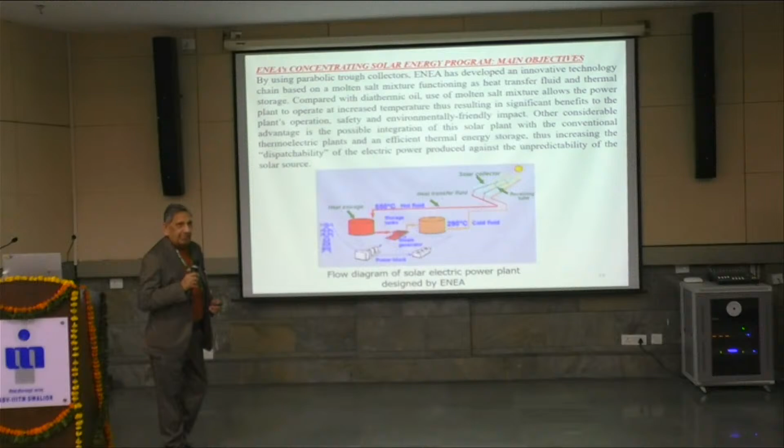Just to summarize it, this is the slide that shows the innovations that have been adopted by ENEA so far as the production of electricity using CSP technology is concerned.

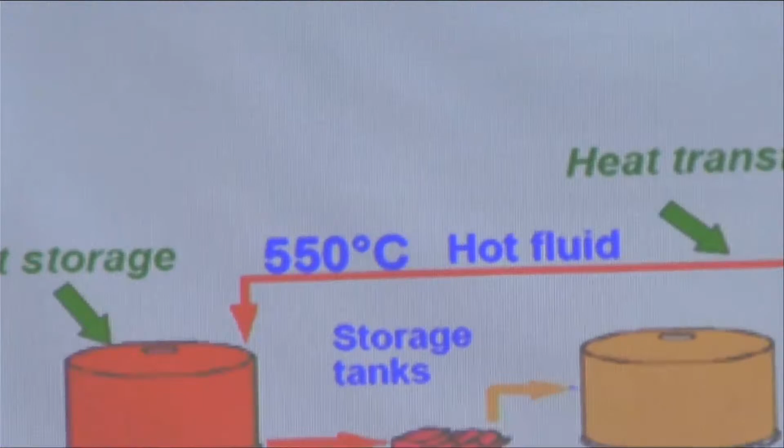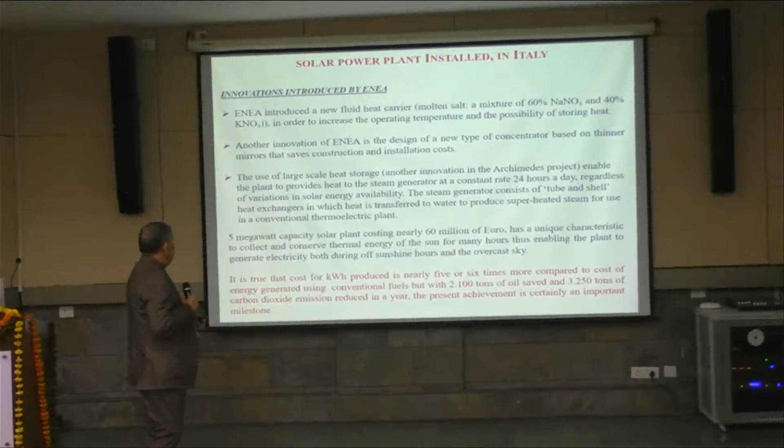So these are the innovations introduced by ENEA. ENEA introduced a new heat carrier, molten salt, a mixture of 60% sodium nitrate and 40% potassium nitrate, in order to increase the operating temperature and the possibility of storing heat.

Another innovation of ENEA is the design of a new type of concentrator based on a thinner mirrors that saves construction and installation cost, along with the use of large-scale heat storage.

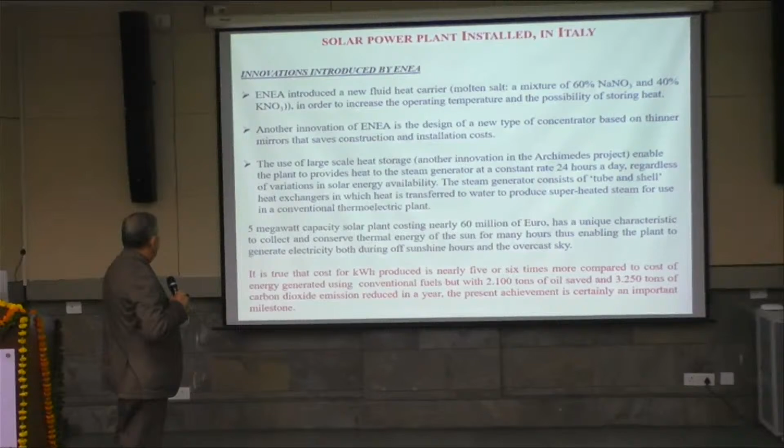Another innovation in the Archimedes project enables the plant to provide heat to the steam generator at a constant rate 24 hours a day. This is a 5 megawatt capacity solar plant costing nearly 60 million euros, having unique characteristics to collect and conserve thermal energy of the sun for many hours, enabling the plant to generate electricity both during off-sunshine hours and during overcast time.

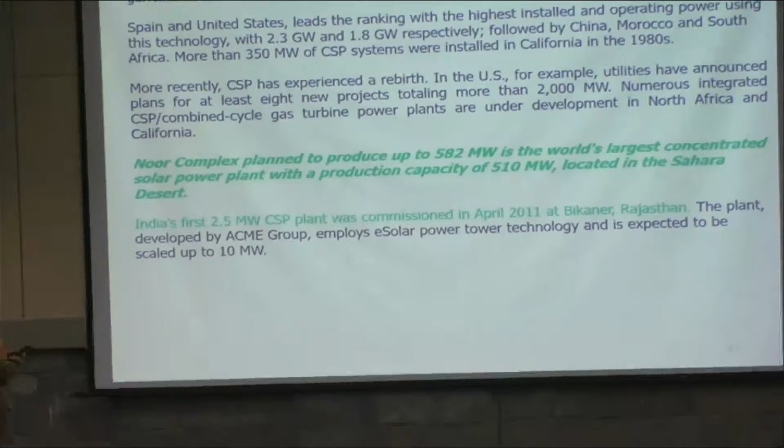This slide is about photovoltaic technology.

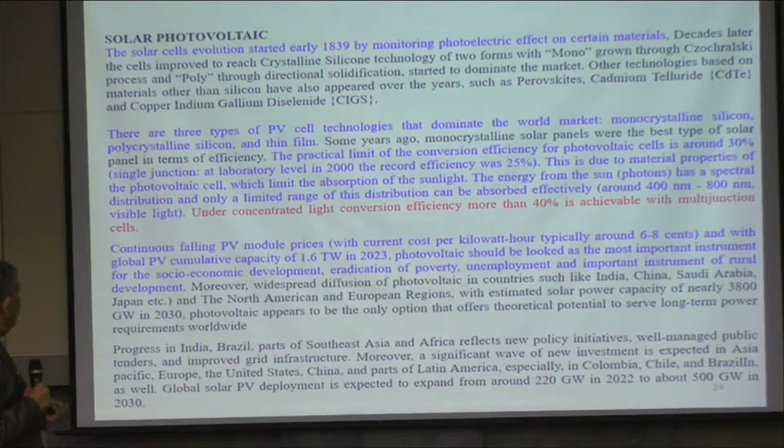As a brief note regarding the cost to produce 1 kilowatt hour using renewable energy sources, as per information available from the literature, hydroelectric power comes in at an average of 5 cents per kilowatt hour. Onshore wind, photovoltaic, biomass, and geothermal are below 10 cents per kilowatt hour, and offshore wind is at 0.13 per kilowatt hour.

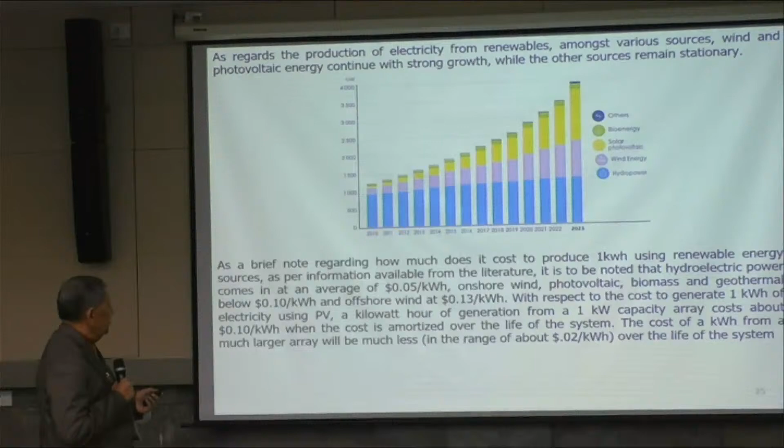With respect to the cost to generate 1 kilowatt hour of electricity using PV, generation from a 1 kilowatt capacity system costs about 0.10 per kilowatt hour when amortized over the life of the system. The cost per kilowatt hour from a much larger installation will be much less, in the range of about 2 cents per kilowatt hour over the life of the system.

So the primary challenge in the photovoltaic sector is to increase energy efficiency, making the structure more capable, and reducing dispersion as much as possible. These next two slides are about biomass.

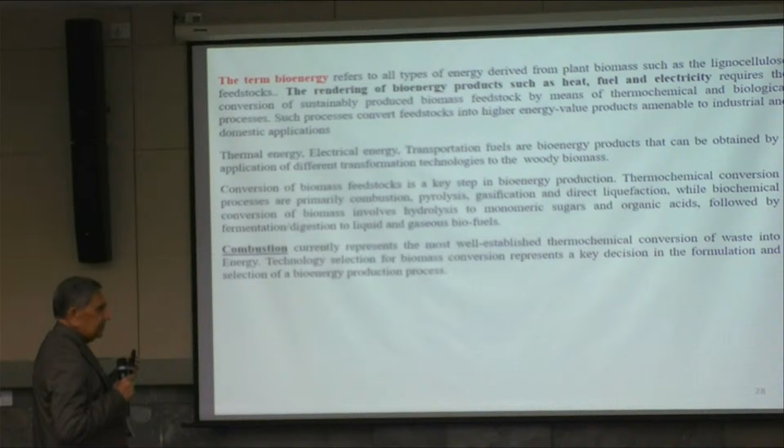I will not go through all these details. I will just tell you what we are doing in this area.

Gasification is currently considered a more attractive process compared to combustion and pyrolysis for both biomass and waste treatment. Moreover, it represents a cleaner alternative solution with respect to increasing environmental restrictions.

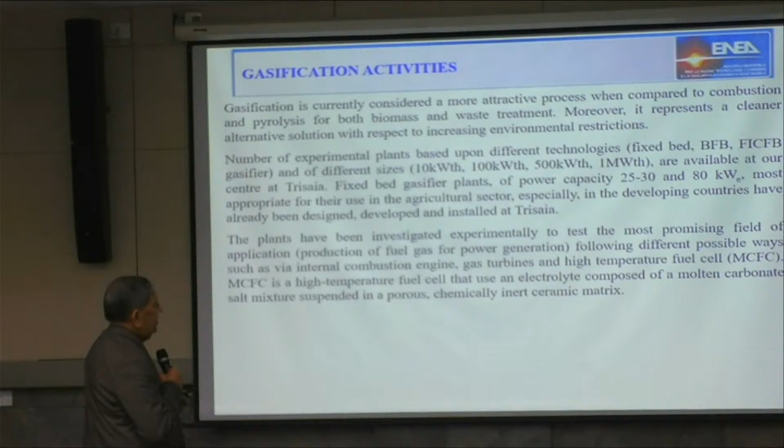There is a number of experimental plants based on different technologies: fixed bed, BFB, and internally circulated fluidized bed gasifiers of different sizes, ranging from 10 kilowatt to 1 megawatt capacity.

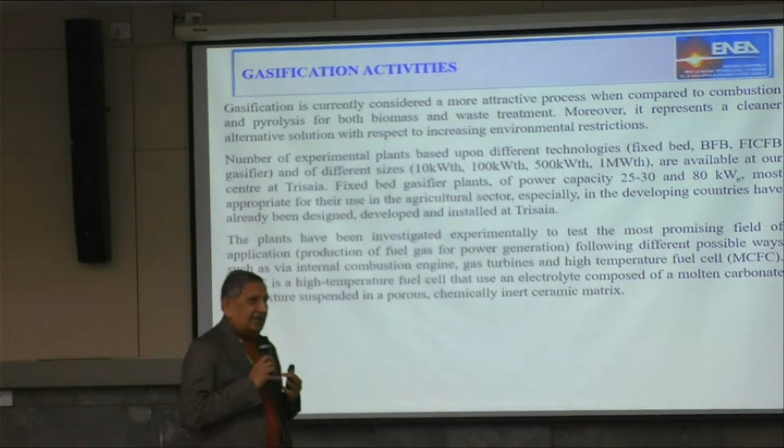These are available at our center, and I am happy to say that our center is the only one at the European level where you can have all these plants. They have been designed, experimented with, and are currently running.

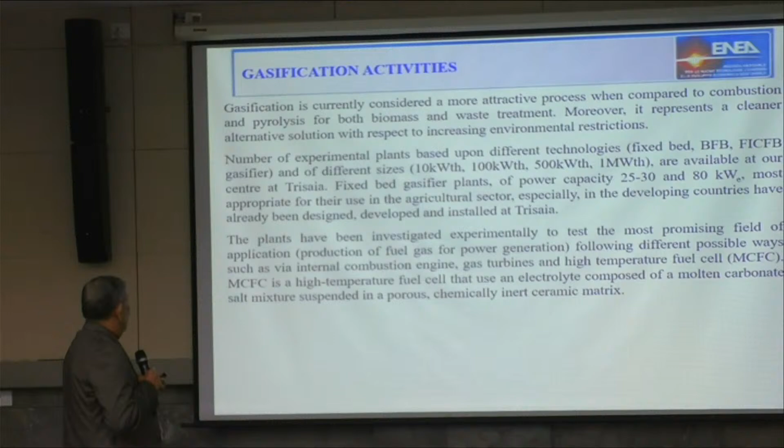So just to say that the fixed bed gasifier plants with power capacity of 25, 30, and 80 kilowatt electric, most appropriate for use in the agriculture sector, especially in developing countries, have already been designed, developed, and installed at our research center.

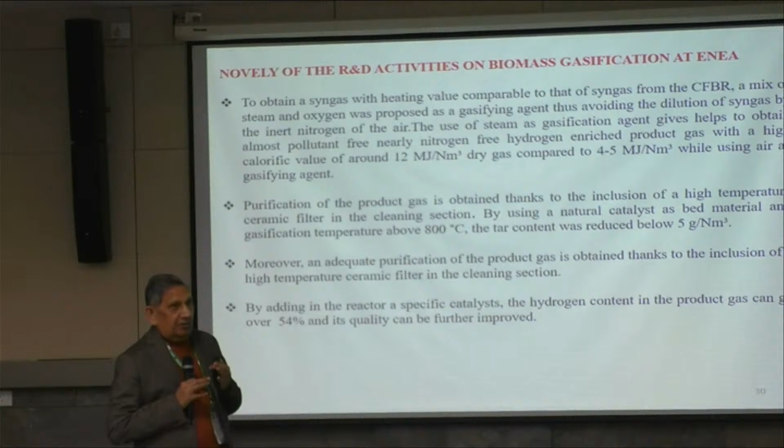For the biomass gasification concern, I am sorry to say that even as of today in India we are using air as the gasification agent. So what does it mean? The calorific value of the gas which we are getting is very low, and moreover the pollutant gases present in the produced gas are very high.

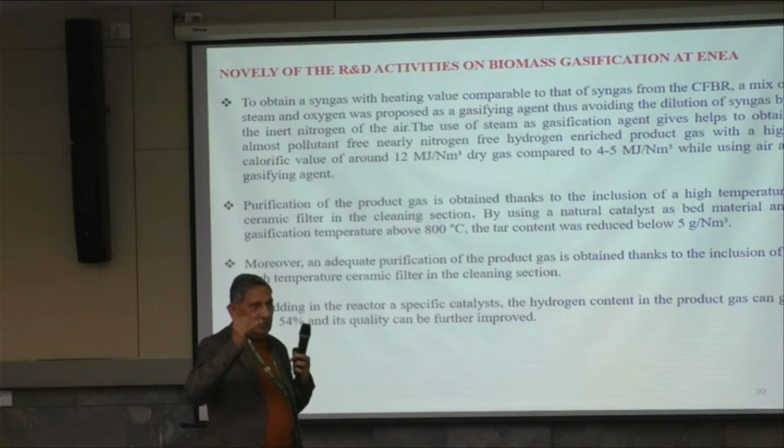Our main aim was to increase the percentage of hydrogen in the produced gas. So what we did at our center to obtain a syngas with heating value comparable to that from CFBR, a mix of steam and oxygen was proposed as a gasifying agent, thus avoiding dilution of the syngas by the inert nitrogen of the air.

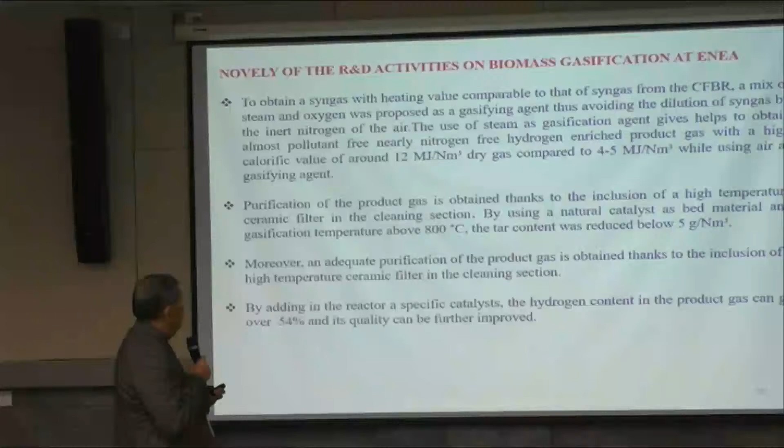The use of steam as gasifier agent helps obtain an almost pollutant-free, nitrogen-free, hydrogen-enriched product gas with a high value of 12 megajoules per normal cubic meter of dry gas, compared to 4 to 5 megajoule.

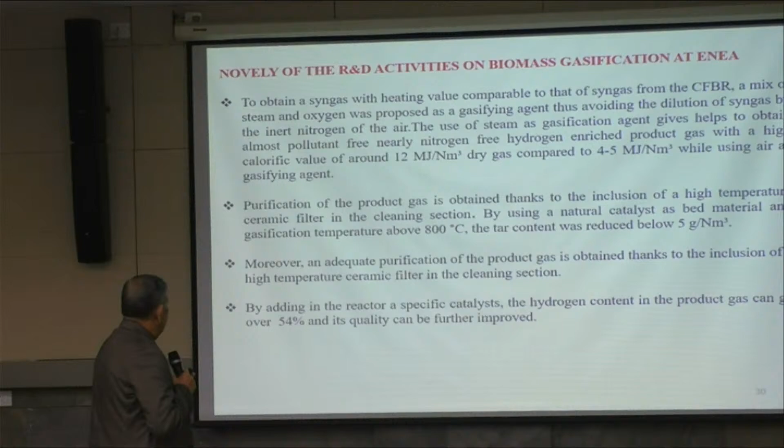Purification of the product gas is obtained thanks to the inclusion of a high temperature ceramic filter in the cleaning section. By adding specific catalyst in the reactor, the hydrogen content in the produced gas can go up over 54% and its quality can be further improved.

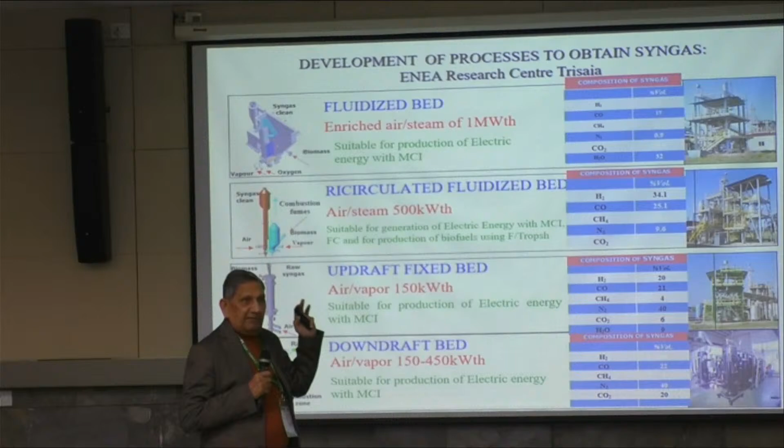This slide shows all these different plants, in the capacity of 150 kilowatt to 1 megawatt thermal capacity. These plants have been installed and experimented, and the results are shown in the slide.

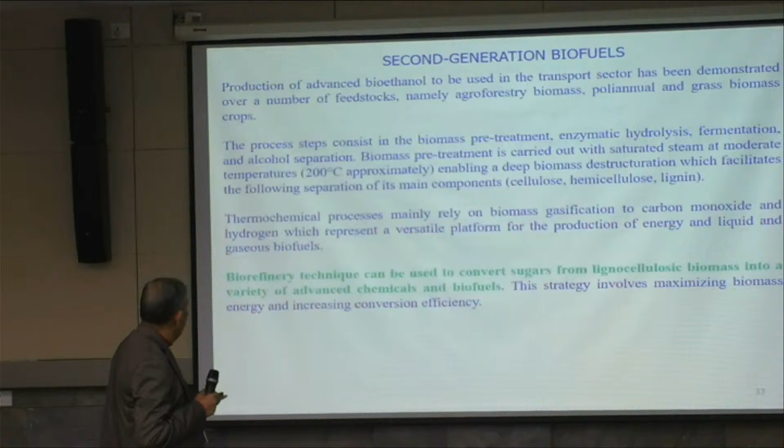I will not go for second generation biofuel. This is from lignocellulosic biomass.

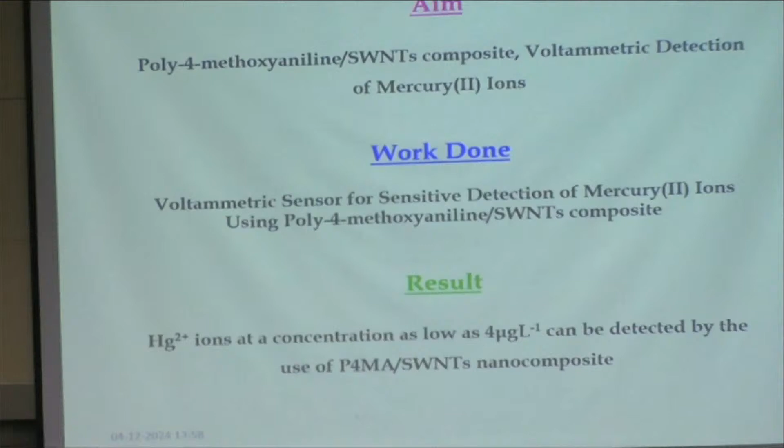Basically this paper aims to synthesize poly-4-methoxyaniline, which is called P4MA. The composite is made with SWNTs composite. After finalizing the synthesis part, we have utilized this nanocomposite for voltammetric detection of mercury ions.

The detection of these mercury ions is done utilizing a voltammetric technique. By utilizing the electrochemical setup, we have performed the detection.

The results were outstanding because this particular sensing element has achieved a maximum contamination level detection. This 4 microgram per liter detection level was optimized, and the not optimized version was also performed.

We all know the entire world is facing a problem, which is global warming. Global warming is caused due to pollution, and there are different types of pollution. Out of that, we have targeted water pollution. Now why does water pollution happen? There are so many reasons, mainly the anthropogenic activities performed by us.

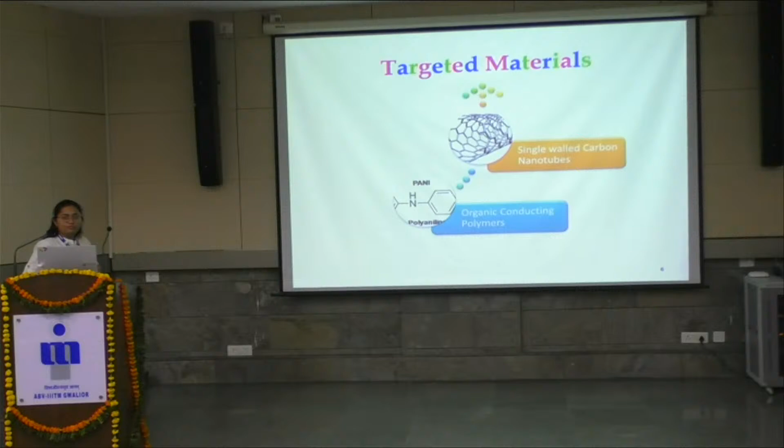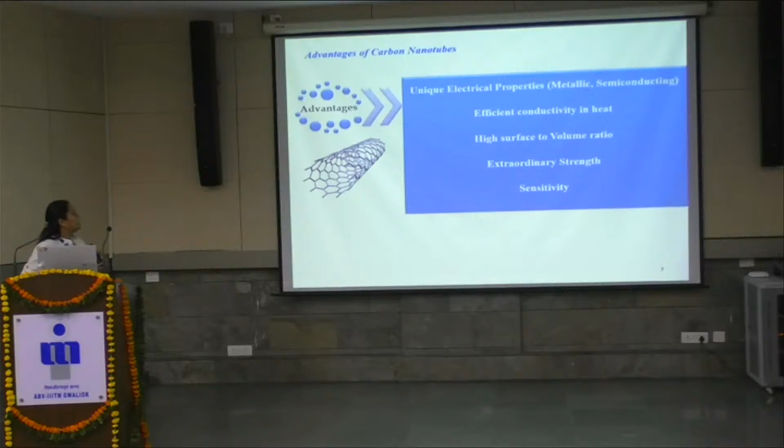So the targeted materials were the P4MA and single walled carbon nanotubes. First of all, why carbon nanotubes? Carbon nanotubes have very unique electrical properties. They are efficient to work in heat also, and since it is a nanomaterial, it has high surface to volume ratio, extraordinary strength, and sensitivity.

But its disadvantages are slow charge transduction and decrease in band gap after high doping. These are the limitations of carbon nanotubes. It is hydrophobic in nature, and since we are targeting the material for water detection, carbon nanotubes being hydrophobic, we have explored organic conducting polymers, say P4MA.

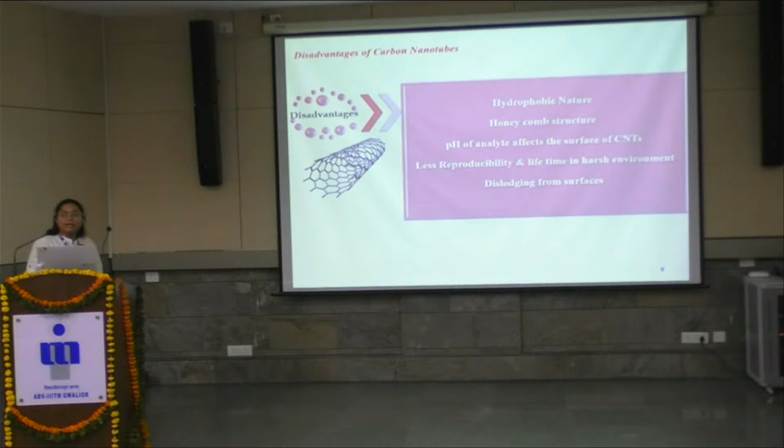After that, the pH of the analyte affects the surface of the CNTs. There is less reproducibility and lifetime in harsh environments, with dislodging from the surfaces. These points have to be addressed when we talk about a sensor, but this we can address by utilizing the organic conducting polymers, the OCPs.

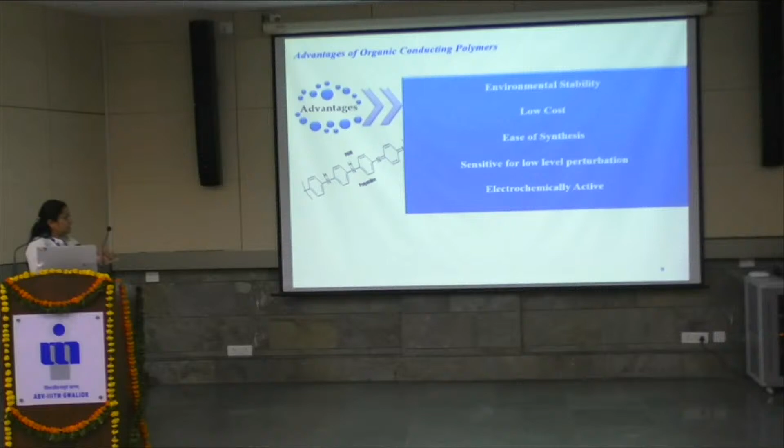So we have utilized organic conducting polymers, which are environmentally stable. They can be worked at normal room temperature. We have ease of synthesis, sensitivity for low level perturbations, and they are electrochemically active.

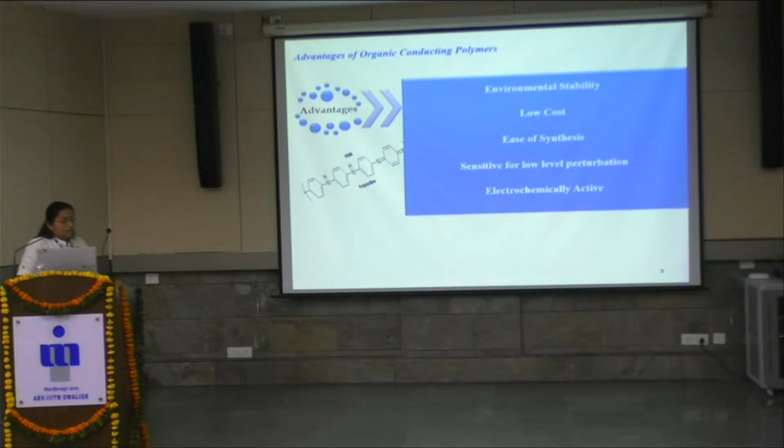Now, a few limitations of the OCPs: low charge transduction and decrease in band gap after higher doping. So these were the advantages and disadvantages of both OCPs and CNTs.

Now, our approach: what we have done is utilize the SWNTs, onto which we deposited OCPs, that is P4MA. Due to this, since we are utilizing this approach, it will give surface activity of the SWNTs retained, and it will act as a sensing backbone, which later can be utilized for the detection of water pollutants.

So our targeted thrust areas were sensitivity, selectivity, and lower detection limit.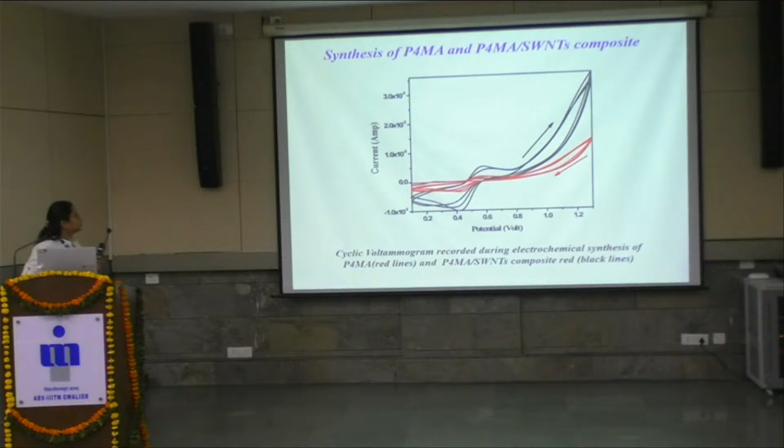This black colored graph is for synthesis of the nanocomposite, where we can confirm a more electroactive nature of the composite.

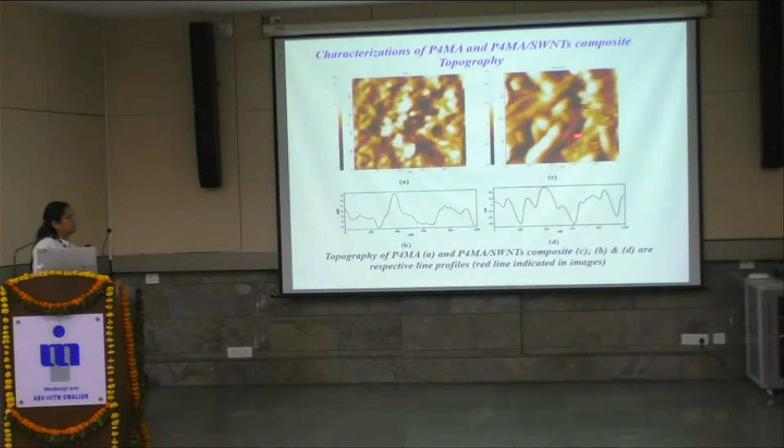This is the AFM graph where AFM images address the topography, and from the images the line profile was drawn showing good roughness. When we talk about an electrochemically active surface, the roughness plays a great amount of role.

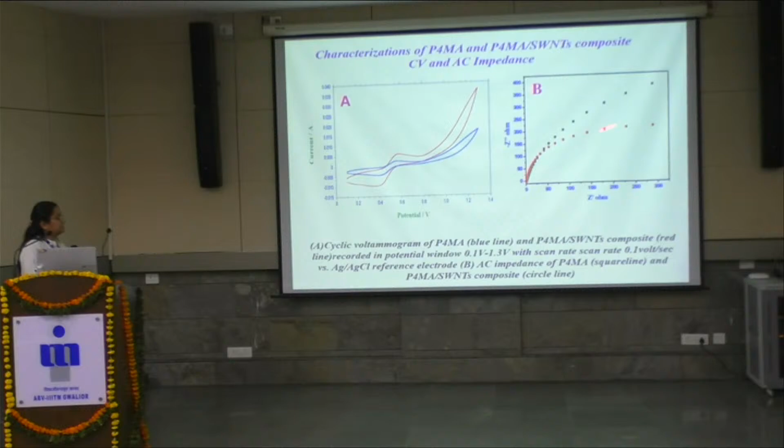Again, the characterizations were done utilizing cyclic voltammetry, where we can confirm the more electroactive nature of the nanocomposite, and the AC impedance spectra again address good electroactive nature of the composite.

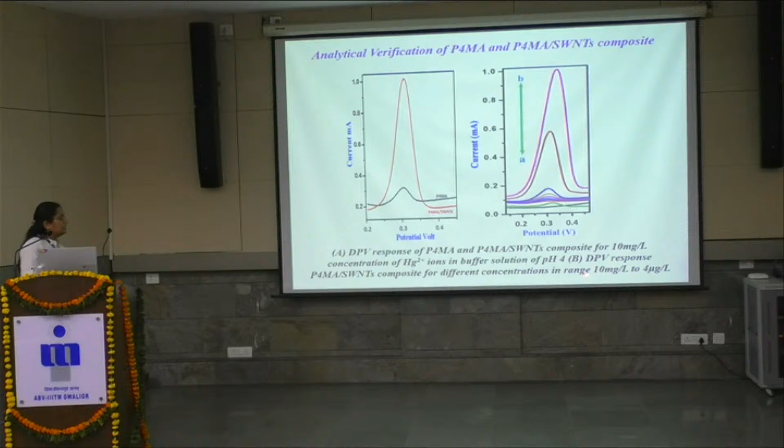First of all, we have explored P4MA for mercury ions, where it has shown less sensitivity. But once we explored the nanocomposite, it has shown good sensitivity. Later, this P4MA SWNTs nanocomposite was explored for different concentrations of mercury ions, and the detection concentrations were in this range.

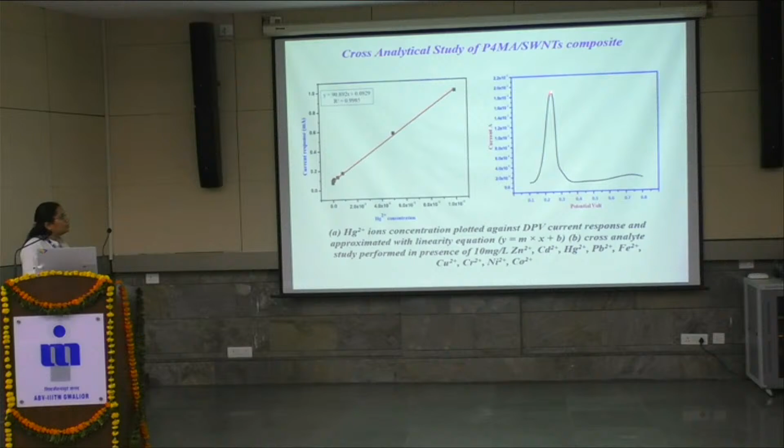Now this is a linearity curve, and it has shown good results. Now this is a selectivity graph, when the nanocomposite was explored for different cross analytes, it has shown a great amount of selectivity.

So in conclusion, the SWNTs have played a good role in showing the good electroactive nature of the P4MA, and the sensor has shown good results. A maximum contamination level was achieved, which is 4 microgram per liter. So, thank you.

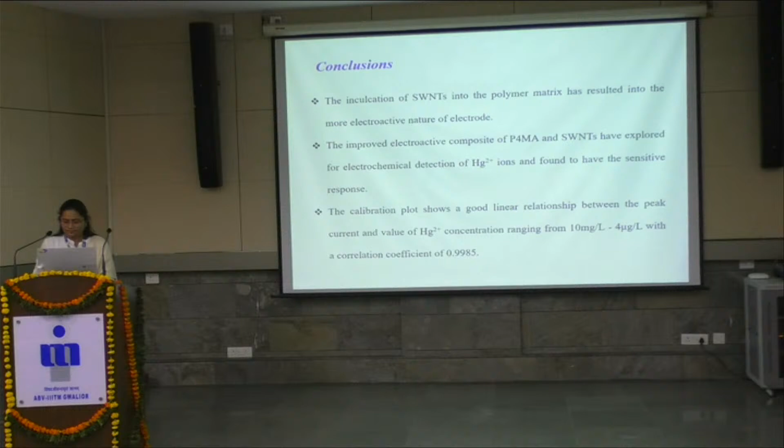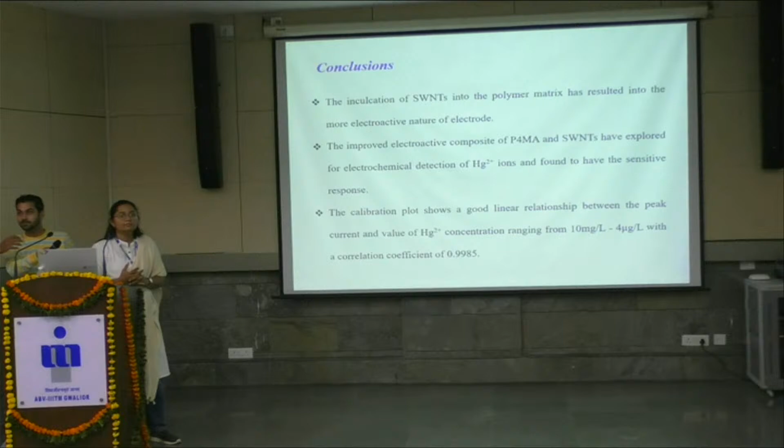How are you confirming that it will respond only to this Hg plus or any other heavy elements it can also respond to?

So the cross analytical study was done. This is a graph where we have explored different ions, done for the cross analytical study. These many ions were utilized to confirm that it is selective toward mercury ions.

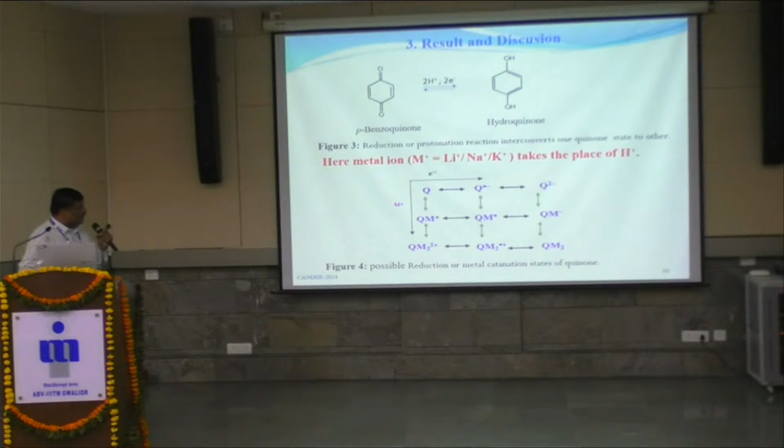First, this MSP calculation shows the charge present on the sp2 hybridized oxygen for the benzoquinone state, benzoquinone radical anion, and benzoquinone dianion states. The charge goes on increasing from benzoquinone to benzoquinone radical to benzoquinone dianion on the oxygen, and all these values are in kilocalories per mole.

This state shows the highest binding energy, negative binding energy.

These calculated values for various lithium, sodium, and potassium cations are shown in the table, and the different oxidation and reduction states of the quinones show different values of binding energy.

But quinone with monocation QM plus state shows a positive value of binding energy, while all other states show these values in front of the oxygen, and R represents the binding energy over the ring of the quinones.

Then the quinone dianion state also shows highly negative values of binding energy compared to all other states.

For a particular state of the quinone, if we consider it, the binding energy with the cations goes on increasing in the direction of hydrogen to potassium, potassium to sodium, sodium to lithium, and then lithium to hydrogen.

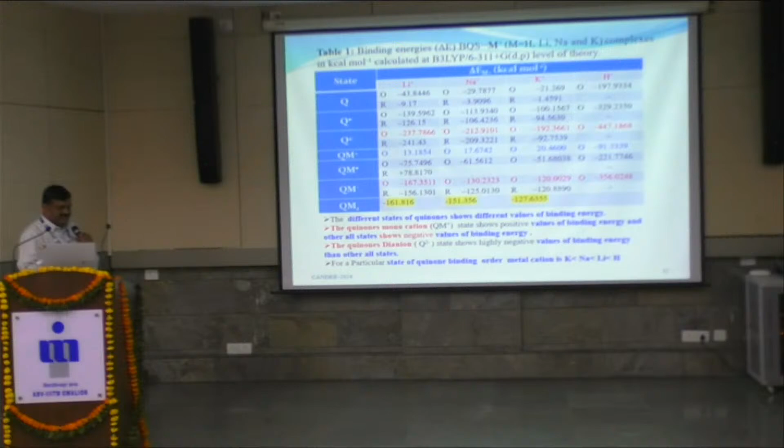But if we see the binding energy change after addition of metal cation and electron, meaning after addition of a metal, these values change for various benzoquinone states.

Here the quinone metal cation state, quinone radical anion state, and quinone radical all show negative values of binding energy, and for a particular state of quinone, the binding energy order goes on changing from lithium to potassium, potassium to sodium.

The same trend is shown in this figure, if we add in this direction for various oxidation states of the quinones, here addition of electron and addition of metal. And if we see along this line, addition of metal, the binding energy change is shown in the figure, and these binding energy values go on changing for various states.

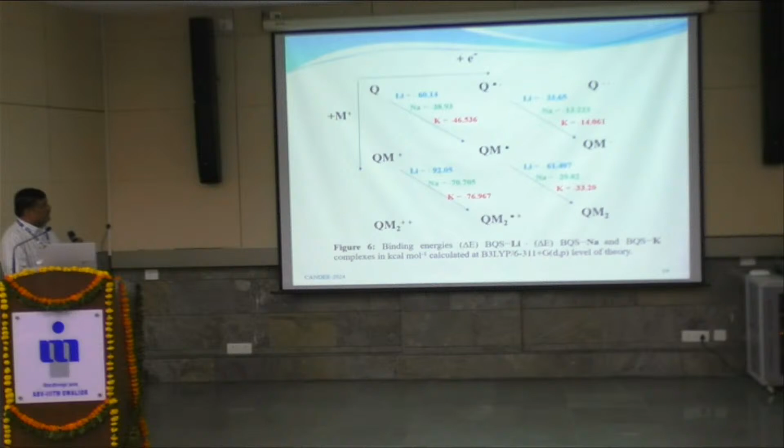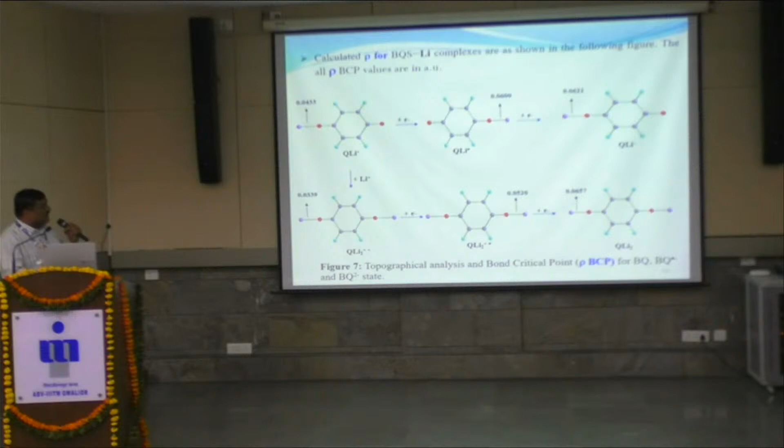But why these binding energies keep changing in front of the oxygen is verified with a calculation of rho BCP for various states of benzoquinone lithium complexes. Figures are shown here: quinone binds with lithium cations, quinone state with lithium radical, and quinone state with lithium anions. These rho BCP values for this particular bond with oxygen atom and lithium keep increasing, and for lithium dication, lithium cation radical, and lithium dimetal these values also increase. Same trend is observed for sodium and potassium, as shown in the table.

Here, all the rho BCP values show higher strength of bond. If we see the trend from potassium to sodium, sodium to lithium, lithium to hydrogen, these values keep increasing and the strength of bond increases. Rho BCP values increase in the order potassium to sodium, lithium to hydrogen.

These negative values of del square rho with hydrogen cation ion show covalent bond. After binding of hydrogen with the oxygen, the del square rho values are reported as negative, which shows covalent bonding. Positive values for lithium cation, sodium cation, and potassium cation show del square rho values are positive, which represents either ionic or electrostatic bonding with oxygen.

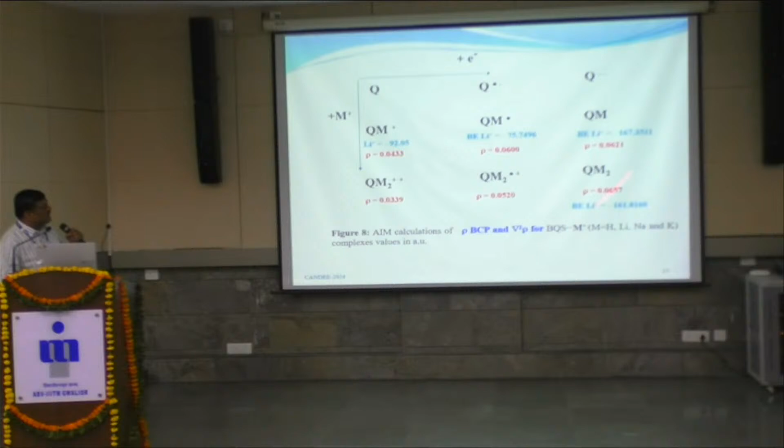Same values are reported here in this various state of the quinones for lithium cation binding and rho BCP change. These values are for lithium only.

But if we calculate the adiabatic ionization potential values and adiabatic electron affinity values for various states of the benzoquinones, the higher positive values of ionization potential show removal of electron is difficult. Higher positive values of this AIP in these various oxidation states of quinone show removal of electron is difficult, but negative values of the adiabatic ionization potential show removal of electron is easy for quinone metal radical cations.

And if we compare the adiabatic electron affinity values, high negative values of electron affinity show addition of electron is difficult, and high positive values of electron affinity show addition of electron is easy.

In comparison with previous binding energy calculation and rho BCP and del square rho BCP calculation, these values are quite different. That is, quinone state with sodium ion binding energy, if compared with hydrogen ion, lithium ion, and potassium ion, shows easy electron removal as compared to this binding energy. Sodium complex allows us to remove electron more easily, and also add electron within that complex more easily. But the trend observed here is slightly different.

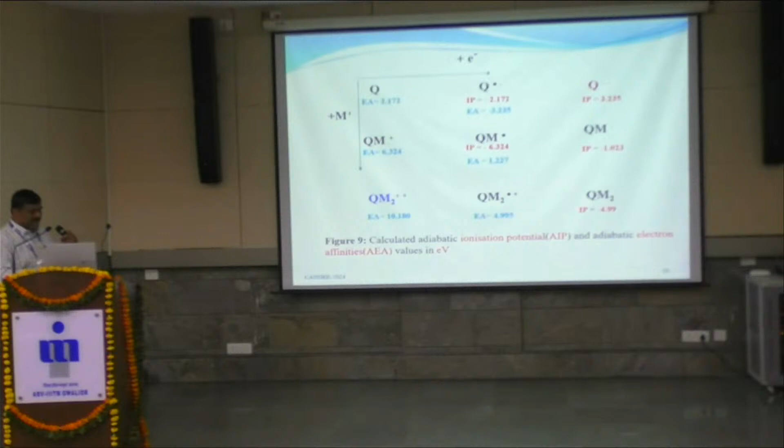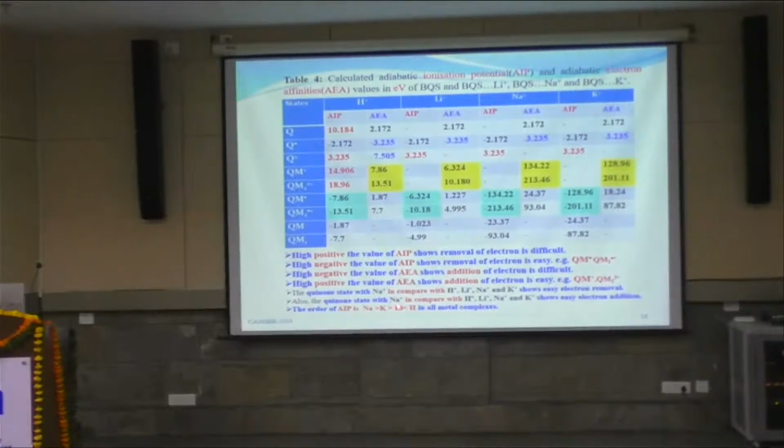If we see the trend, this adiabatic ionization potential trend is slightly different: sodium is higher than potassium, potassium is higher than lithium and hydrogen. From this, we conclude that we have explored lithium ion, sodium ion, and potassium ion, as well as metal ions' binding ability with quinone, as compared with H plus ion.

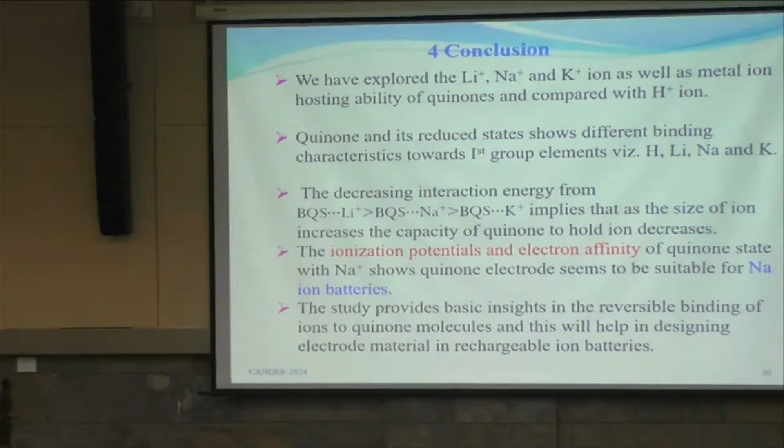Quinones and their reduced state show different binding characteristics towards the first group of elements: hydrogen, lithium, sodium, and potassium. But with decreasing interaction energy across these various complexes, the benzoquinone-lithium complex and benzoquinone-sodium complex are better compared with the benzoquinone-potassium complex, implying that as the size of the ion increases, the capacity of quinone to hold the ion decreases.

But ionization potential values and electron affinity values of quinone state with sodium ion show that quinone electrode seems to be suitable for sodium ion batteries. This study provides basic insight into the reversible binding of ions to quinone molecules, and will help in designing electrode material for rechargeable ion batteries.

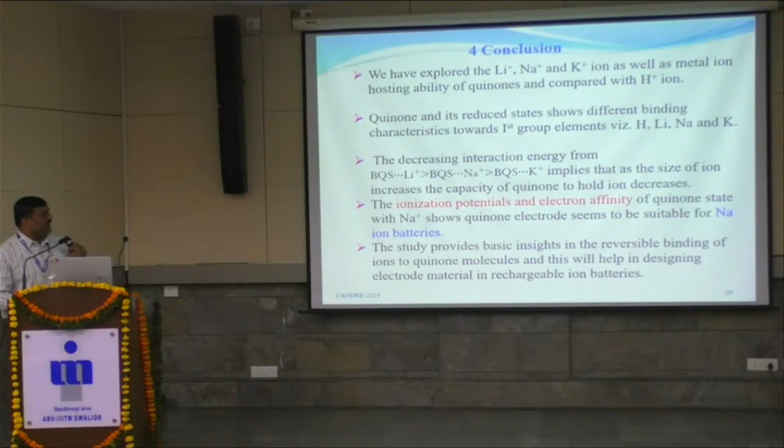I strongly acknowledge Dr. Subhash Pillai sir, he has helped me during my research. Also the head of department of chemistry and principal of my college, Dr. Prakash Patil sir, my research colleagues Miss Anuja Ware and Miss Surya, and I thank the organizers for giving me a chance to present my research work here. Thank you.